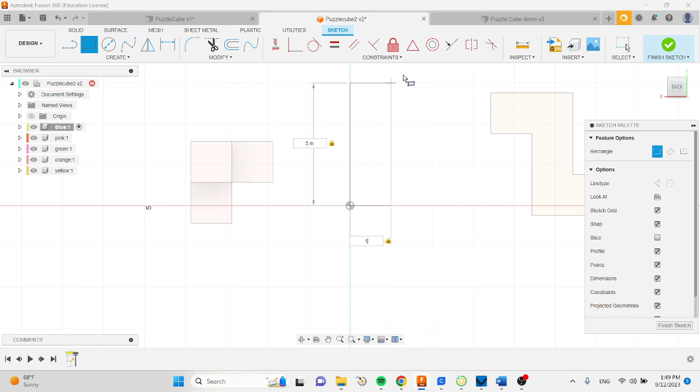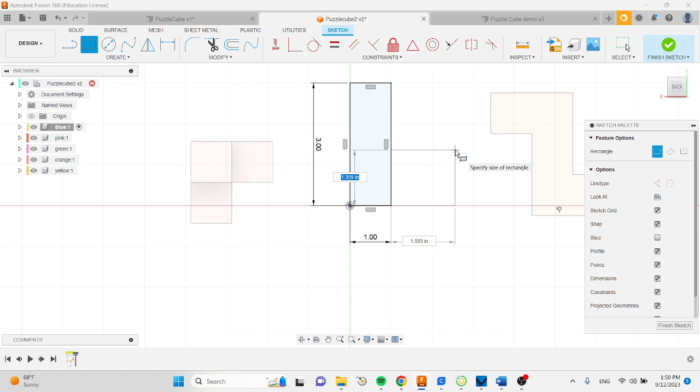Going back to my print, I just drew this big, tall 3 by 1. Now I'm going to draw this little 1 by 1. Again, I'm getting all of the measurements from this print by just either subtracting surfaces from one another or looking at other views to figure out how big this shape would be. It's 1 by 1. Make sure you snap to existing geometry. Roll your mouse out. 1, tab 1.

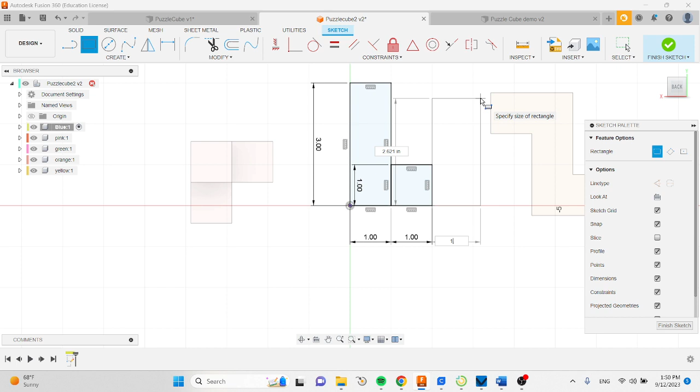And then I'm going to go back and look at this last rectangle, which is 2 tall by 1 wide. I can see that in my top view. I'm going to head on over to Fusion, and I'm going to draw that. 1, tab 2. So there we go. We have 3 profiles or 3 shapes that I'm going to finish my sketch, and I'm going to extrude them. A lot of people wonder if you should be extruding in the negative or positive direction. For this project, it really doesn't matter. In future projects, it might, but for this one, it doesn't.

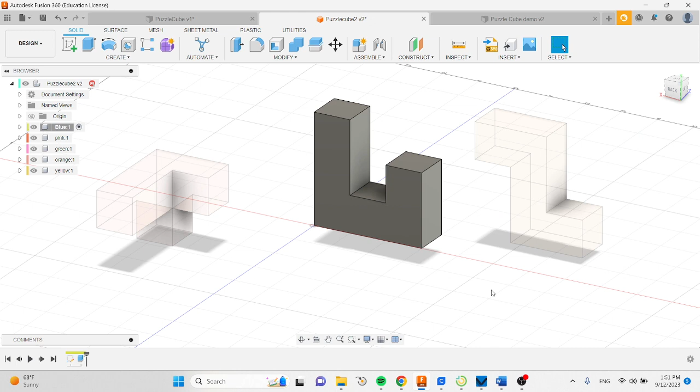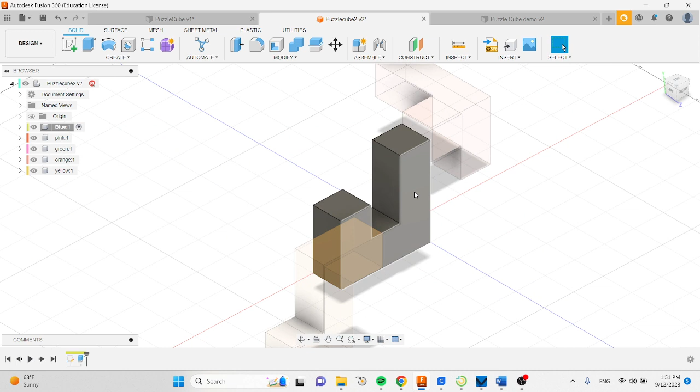All right. So with this shape, going back to the print, you can kind of see if I toggle between the two where that little extra extrusion is. It's just behind that taller leg of the U. So if I spin my part around to the back side, it's on this back side. And you can kind of see that if I go back. If I look at the right side view, it's this shape. So it's 2 inches tall. You can see this dimension here. It's a 2 inches tall and 1 inch wide rectangle.

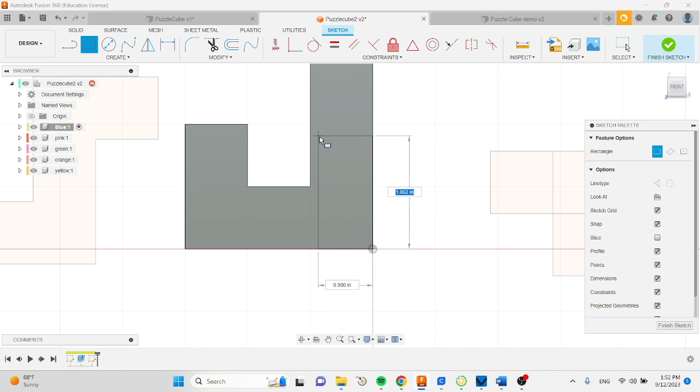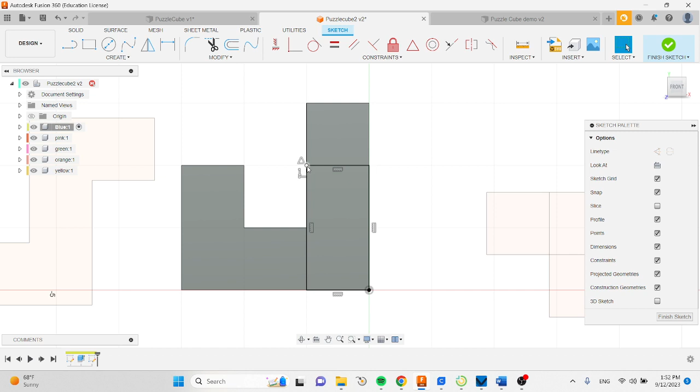So I'm going to make a sketch here. And I'm going to draw a rectangle on the taller part of the U. And notice how I'm able to snap to that midpoint there. And it turned black because this line segment between here and here has a midpoint, a halfway point, and I was able to snap to it. So I will not need a dimension to go 1 inch down because halfway between here and here is 1 inch. So it knows. So I'm going to finish my sketch and I'm going to extrude it 1 inch.

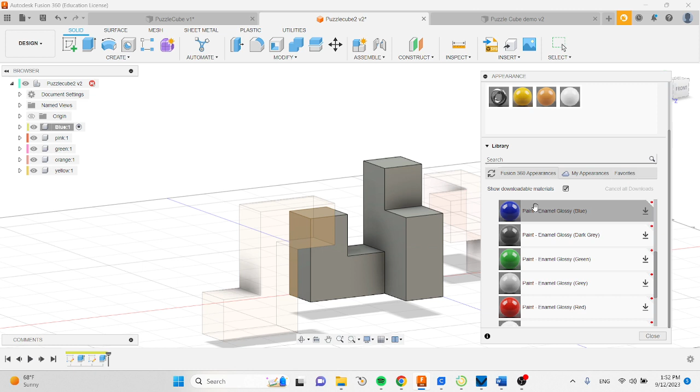And I'm going to finish my extrusion. I'm going to press A. I'm going to go into my paint folder and I'm going to drag blue over. And I'm going to activate my assembly. Click save. And now if I move this stuff around, I should have 3 of my 5 parts done. So all that's left for you is pink and green.

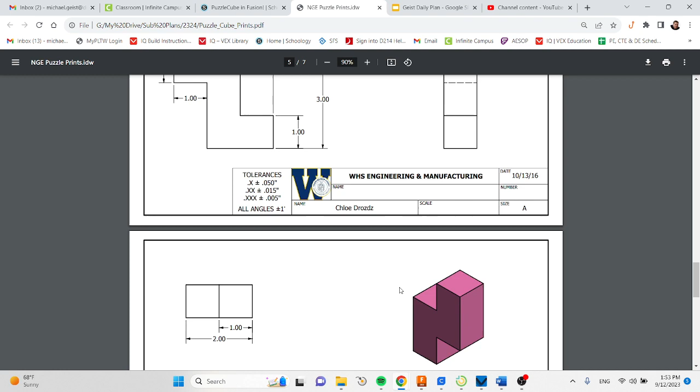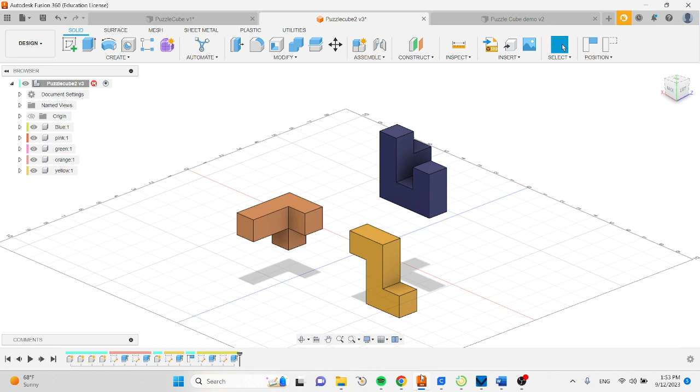I am not going to create a video for pink and green because pink is just as easy as yellow, if not easier. Just 2 rectangles. And then green is also just 2 rectangles. You should be able to complete that. If not, go back to the yellow one and watch that video again. It's basically the same thing with slightly different geometry. So, all right, good luck. And then when you're done, you have all 5, move on to the assembly video.